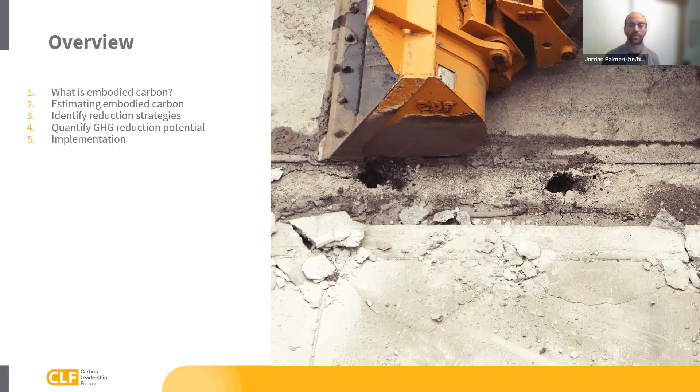So we're going to cover how to incorporate embodied carbon into climate action plans today. Next slide, please. Here's what we will cover. I'll talk about a basic definition of embodied carbon, how we're starting to see it show up in different greenhouse gas emissions inventories, and then my colleagues will cover the last three there and give you examples of how they are being realized in North America today. Okay, next slide. Embodied carbon refers to the greenhouse gas emissions from the manufacture, transport, installation, maintenance, and disposal and/or recovery of construction materials. Next slide, please. We want to look at this visually.

All of the emissions in the gold color here are emissions that contribute to embodied carbon. Anything from harvesting raw materials, transporting those materials to a factory, actually manufacturing the materials, the emissions from the construction equipment and constructing buildings and/or infrastructure. All of these emissions contribute to embodied carbon. We're increasingly spending more and more time focusing on the embodied carbon emissions because they're starting to show up in our greenhouse gas inventories as large sectors to abate.

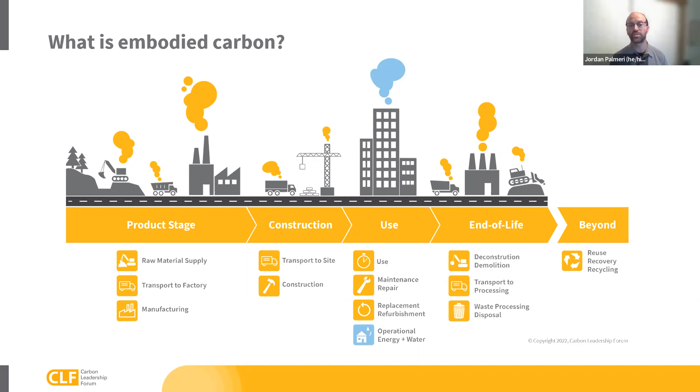Over the next 10 minutes or so, I'm going to spend some time looking at greenhouse gas inventories at the global level, the state level, the local level, and then a little bit at the agency level to give you all an idea of how embodied carbon is being identified in today's GHG inventories. Next slide, please. So let's start at the global level.

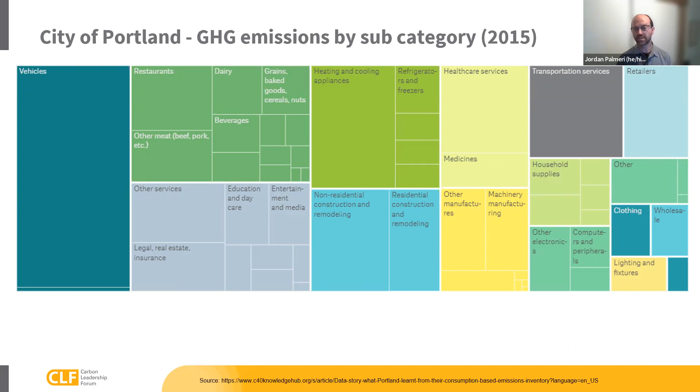Let's work down to the city level on the next slide and talk about the city of Portland. Here's a tree map of City of Portland's consumption-based greenhouse gas emissions by subcategory. If you move on to the next slide, the thing that I want to focus on here, thank you, is just the building sector emissions. Now, if you notice here, these building material emissions are actually quite large compared to the building energy emissions. And it turns out that when you're just looking at the building sector within the city of Portland, Oregon, building materials themselves contribute up to 45% of total emissions. And the energy used in buildings only contributes 55%.

So again, this is a way to think about not only identifying where your impacts occur, but how to spend your time and resources. Within the built environment sector, I'd be spending 45% of my time on reducing the impacts of building materials here. And so as someone who lives in the city of Portland, my educated guess on why we're seeing building materials contribute more to emissions than we did, let's say, at the state level is for a couple of reasons.

One, there's a lot of construction happening in the city of Portland, and overall, a lot of materials are being consumed. And then two, we also see there's a lot of programs to address energy efficiency in existing buildings, both residential and commercial, and a lot of good work happening through rating systems where newly constructed buildings are meeting well above code targets for energy efficiency. So as the efficiency of our buildings increases, the relative impact of materials becomes greater and greater. All right, let's go to the next slide.

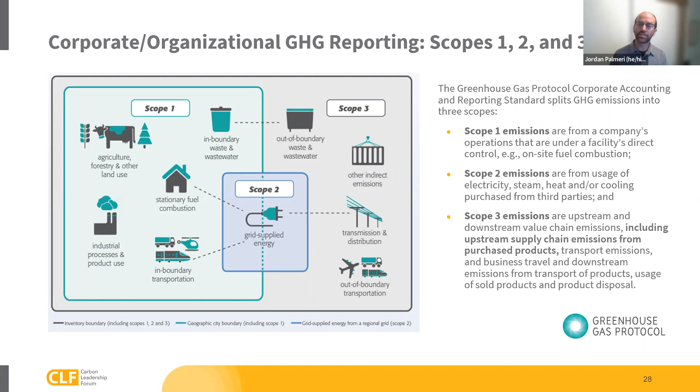Wrapping up here, I do want to point out that there's many people in the audience that are from either state or local government, and you may be doing greenhouse gas emissions inventories of your organization, your agency, your corporation, your entity. And in that case, these types of inventories are largely referred to as scope 1, 2, and 3 inventories. Building materials, the purchase and consumption of building materials are going to show up in your scope 3 emissions. I'm going to give two examples from two different agencies in the next two slides of how we see this happening. This next slide shows work that we just completed in April for Washington State Department of Transportation.

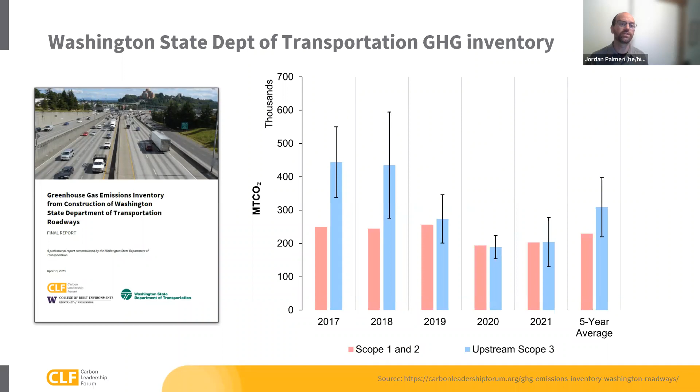So this is how you can do this at an agency level. This is a little bit more of a bottom-up approach versus a top-down approach, like some of the community inventories. So to wrap up here, the point is whether you're doing a community-based GHG inventory or a GHG inventory at an agency level, you're going to see embodied carbon show up in these inventories.

And then my co-speakers here are going to start to cover different strategies, how to reduce these emissions and identify the reduction potential. So with that, I'm going to hand it over to Rebecca at RMI.

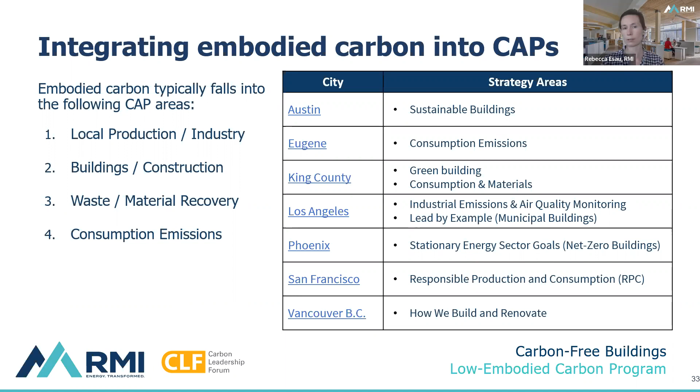The table on the slide highlights 7 different cities that have included embodied carbon in their climate action plans, and the topic or strategy area where those embodied carbon strategies fall. So you'll see examples in building and construction, consumption emissions, materials, and industrial emissions. Next slide, please.

And setting an overall embodied carbon reduction target is a really important commitment and a step towards measuring progress as those strategies are put into action. There are target setting guidelines from C40 and Architecture 2030 to model from. These include a 50% reduction by 2030 goal for C40's Clean Construction Declaration and a zero global warming potential by 2040 goal for Architecture 2030's embodied carbon targets.

The table on the right of the slide shows examples of reduction targets described in 4 different cities' climate action plans. And you'll see that some describe reduction from a particular baseline and some do not, but all of them set these clear time-bound goals for reduction.

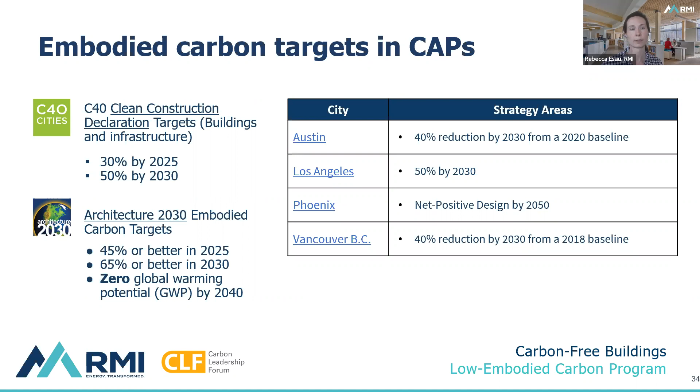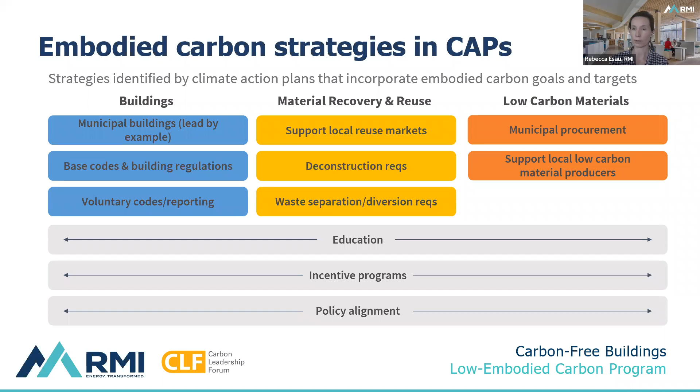Incentive programs that encourage reductions, and aligning existing and new policies that directly address or are adjacent to embodied carbon emissions, we've seen as a popular strategy that's included in climate action plans. Next slide.

So here I did want to point out an important resource developed by the CNCA that presents 52 different policy options for cities to reduce embodied carbon. It's pretty dense. It's basically an almost encyclopedic resource that shows the full range of embodied carbon policy options. These policies are divided into topic areas and ranked based on their carbon reduction impact.

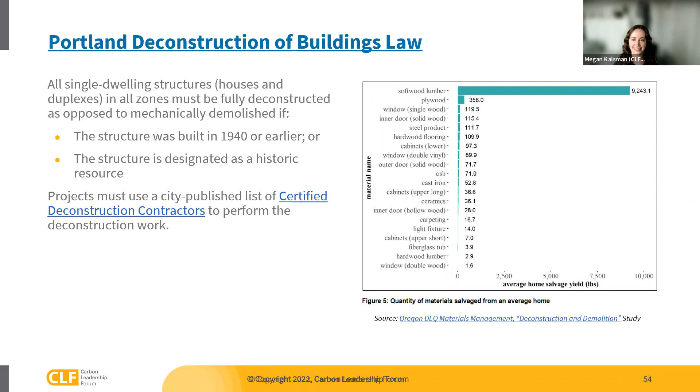So you can read a little bit more about this in our case study with the Pacific Coast Collaborative, but I just have a few timeline points about how it started and some of the stakeholders that they worked with. So yeah, the work really began in 2015. They were doing modeling scenarios, looking at deconstruction versus demolition.

So with all those examples and also many more on our policy tracker, I will encourage you to go on our website to check that out. How do we measure? How do we see the emissions that we're reducing? Well, we published a report around an Embodied Carbon Policy Reduction Calculator, and you can find it here on our webpage. We'll be sending the links after. Next slide.

So the project goal was really to establish a way for planners and policymakers to model the carbon savings of different policies around embodied carbon for their specific city. And so we wanted to allow for comparison of reduction policies for embodied carbon by key target dates that we've heard, 2030, 2050, to really ask what is the largest impact for my city.

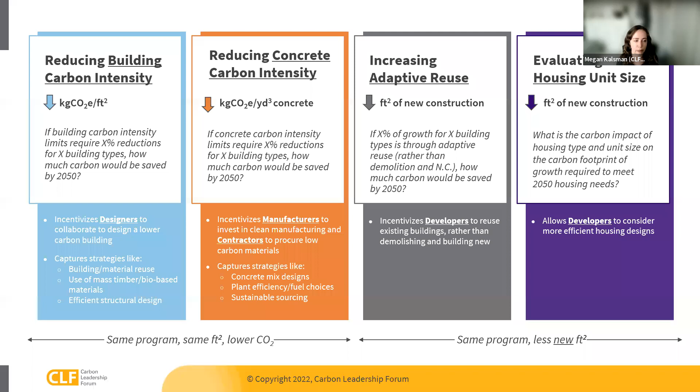And in the next slide, I have just a quick snapshot of the 4 different policy areas that you can find in this report that we looked at. One is reducing the embodied carbon footprint of entire buildings. 2, limiting the embodied carbon footprint of concrete specifically. 3, increasing adaptive reuse. And 4, evaluating the carbon impact of housing policy.

So I just wanted to share that tool with you. If you are interested, send us an email and we can send it to you. And yeah, would recommend that you read the report and check it out and see how you can apply this tool in your city. Next slide, please.

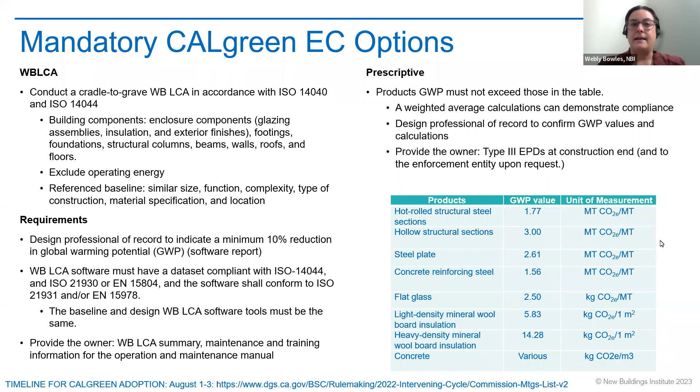shows the global warming potential requirements for the prescriptive approach. And I have these here just so they can be referenced later. You can see the products on the left-hand side. Those align with Buy Clean California. Concrete is added here. Concrete can be achieved in two different paths. One can be kind of a weighted average, which is that messy calculation that you see down there on the left for reference later, or each concrete strength can be achieved per that limit that you see there.

And this is set, since this is the mandatory requirement, at 175% of industry average, which ends up being about the 90th percentile. And the reason for this is so that more projects can comply. It's this entry level point into setting GWP limits per product. Next slide.

So I'll leave you with this again. In California, we see that several climate action plans include embodied carbon goals, like San Francisco, where they want to balance carbon and they have specific actions for it. That's really important. At the state level, there's Buy Clean California that really primes the market with the state showing that what is possible

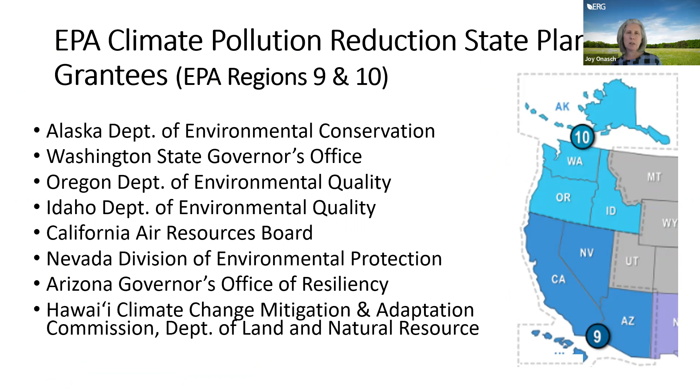I'm just going to do a quick run through the next few slides, so we'll have time for questions and answers at the end of our conversation. This slide is the EPA Region 9 and 10 agencies receiving state planning grants. And the next slide, these are the major metropolitan area grant lead agencies and areas covered in the West Coast regions. And plus, on the next slide, we have many agencies in California that are receiving metro area planning grants.

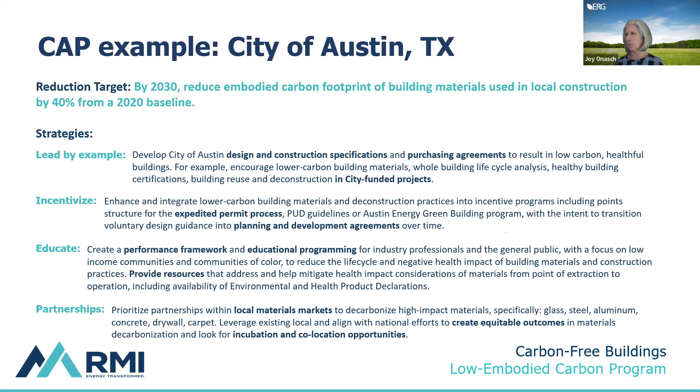Maybe Katie can elaborate. Yeah, Kate, since you had a few questions, do you want to raise your hand and Julia can find you and unmute you? There she is. Okay, Julia, can you find Kate and unmute her so she can speak? Kate, I've asked to unmute you. Yes. There we go. Thanks so much.

So if you look at A1, that's raw material extraction. So that would include mining and other activities that you need to actually get that virgin material out of the ground to then make those bricks that are in the wheelbarrow. Yeah, I figured it did, but it doesn't say it. So I just thought I'd ask to make sure if it was an oversight, because we all know now that's really important. Thank you. Yeah, thanks for clarifying that.

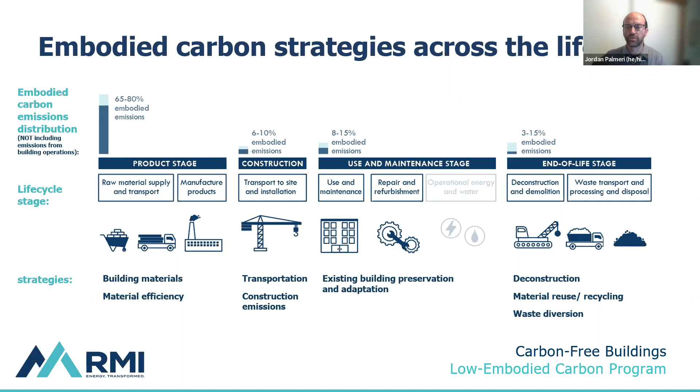Thanks, Rebecca. There was another, go ahead, Jordan. Yeah, I was just going to say the last thing I'd add about just maybe communication style or messages when talking to different audiences is that there's been some studies that material conservation is more of sort of a universal message, regardless of what side of the political spectrum you are on. So that could be helpful in your talking points.

And then also when we think about embodied carbon, if you want to focus a little less on greenhouse gas emissions and global warming and focus more on industrial efficiency and manufacturing efficiency, I think most people can relate to the message of energy efficiency. And really what we're talking about at some levels on embodied carbon is just more efficiently producing building materials. So I think people can relate to that across political spectrums as another messaging strategy.